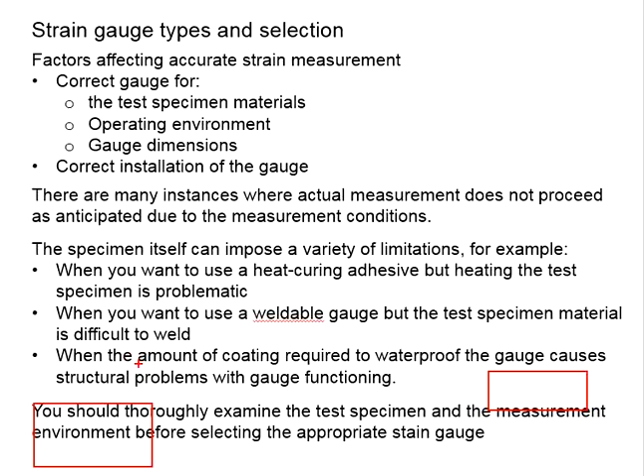The specimen itself can impose a variety of limitations. For example, when you want to use a heat curing adhesive but heating the test specimen is problematic, or when you want to use a weldable gauge but the test specimen material is difficult to weld, or when the amount of coating required to waterproof the gauge causes structural problems with gauge functioning. This may affect the ability of the strain gauge to do accurate measurement. You should thoroughly examine the test specimen as well as the measurement environment before selecting the appropriate strain gauge.

There are many types of strain gauge. Each has different purposes and features. In general, they can be classified into four broad groups. First, it will be the testing temperature. There are applicable ranges for the strain gauges. Some are suitable for low temperature. Some are for normal temperature, high temperature, and super high temperature.

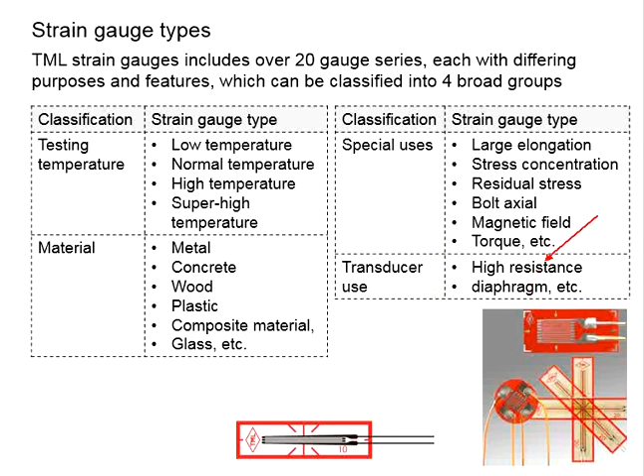The strain gauge can also be classified based on the materials of the test specimen. These include metal, concrete, wood, plastic, composite material, glass, and so on. Strain gauges can also be classified based on special uses, whether you need them for large elongations, stress concentrations, residual stress, bolt axial force, magnetic field, torque, and so on. The last one is transducer use, whether it is high resistance or diaphragm, and so on.

The second criterion of strain gauge selection is the size of the strain gauge. This is sometimes dependent on the location where the strain gauge is to be installed, as well as the materials that you intend to measure. Not only that, you might need to consider the space required for the coating when determining the gauge size, as normally the lead wire will need to be connected to the connecting terminal.

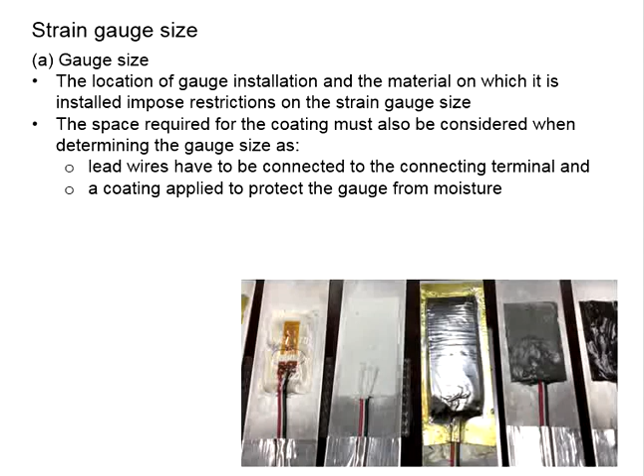Something like this. You have a typical strain gauge. It doesn't come with the wires. You will need to do some soldering in order to connect the strain gauge to the wire so that it can be connected to the data logger. Now you will need space for you to place the terminal and also for you to do the soldering. This is how you do the soldering.

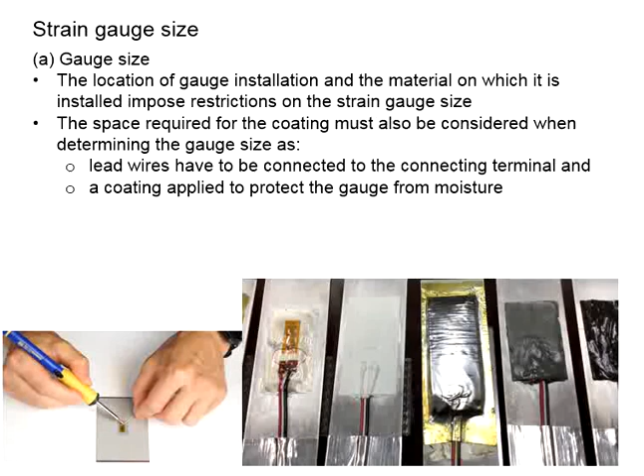You need to be able to access the strain gauge, which has already been installed on your test specimen. This requires space. Or you need to consider the space required for the coating applied to protect the gauge from moisture. With that, determining the suitable size of the strain gauge is important.

Another thing that you need to consider related to the strain gauge size is the gauge length. This refers to the length of the sensitive element in the strain gauge. Depending on your test specimen, a different gauge length is selected.

Now, short gauge lengths are used for local strain, while long gauge lengths are for average strain over a large area. You may refer to the table here for the applications of strain gauges with different gauge lengths. A strain gauge with a gauge length of 0.2 to 1 mm is normally used to measure stress concentrations. This is very narrow in fact.

You will need to select the locations of the measurement carefully to be able to pinpoint and measure the strain that is later converted into stress. As for metals and general use, the suitable gauge length will be between 2 to 6 mm.

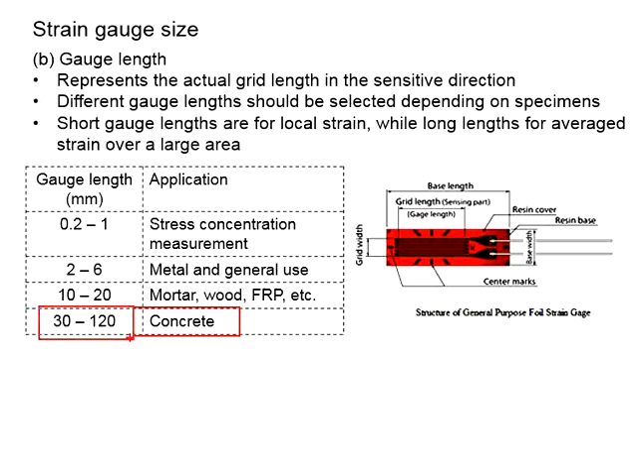For mortar, wood, and FRP, FRP stands for fiber reinforced polymer, you may use a gauge length of 10 mm to 20 mm. As for concrete, you can use a gauge length of 30 to 120 mm. These are some tips that you can consider while selecting the suitable gauge length.

Heterogeneous materials are normally composites, where the contents have diverse characters. One example of this kind of material is concrete, which is made of cement paste and aggregate. If you're dealing with this kind of material, due to the diversity of the properties of their compounds, measuring local strain becomes not representative.

When this kind of material is subjected to load, stress normally concentrates at the weaker compound, progressively damaging the weaker compound, until at the end of the day the entire specimen fails. Taking concrete as an example, we know that the aggregate is very strong. The weak part is normally the bond between the aggregate and the cement paste.

Now, how can you tell, in the concrete, where the possible places are that give you high stress that ultimately may go beyond the strength of the material and lead to its failure? In that case, it is more suitable to determine the average of the irregular strain in the material. That means the strain gauge should cover a wider area in order to acquire the average value over the measured region.

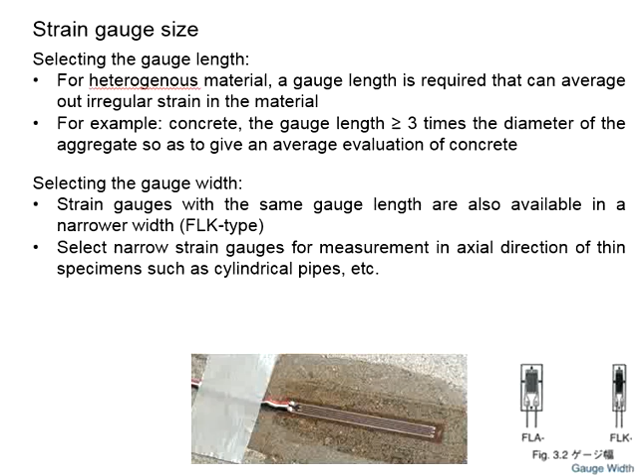Next is selecting the gauge width. Strain gauges with the same gauge length are also available in a narrower width, something like this. This is the FLA series, and this is the FLK series. Then you will have to consider which one is more suitable for your test specimen.

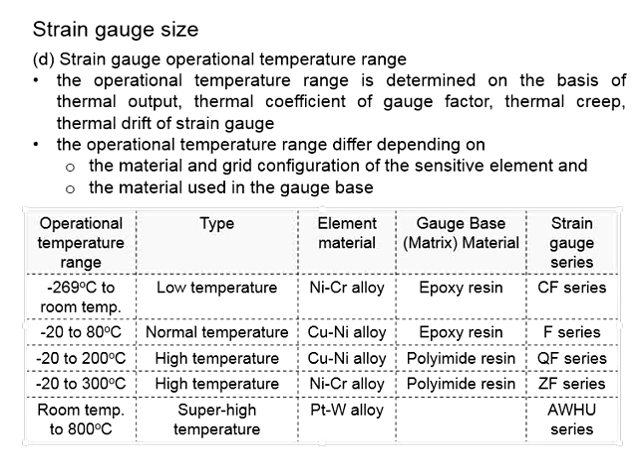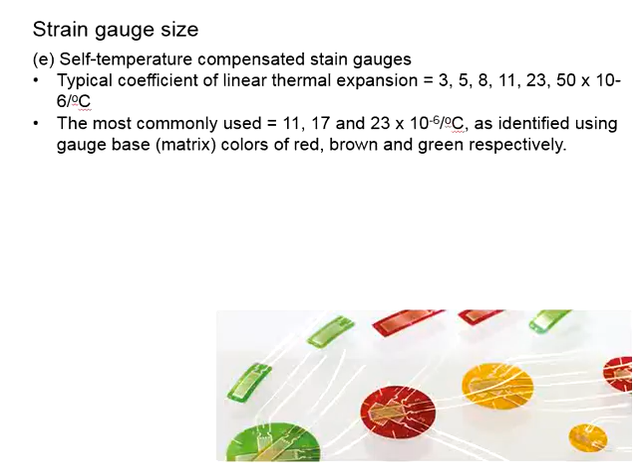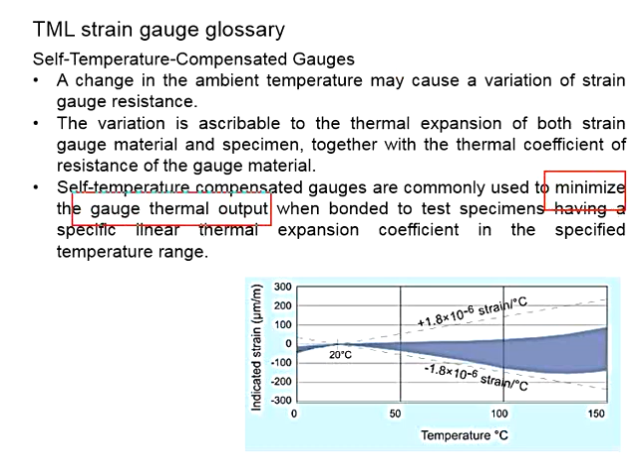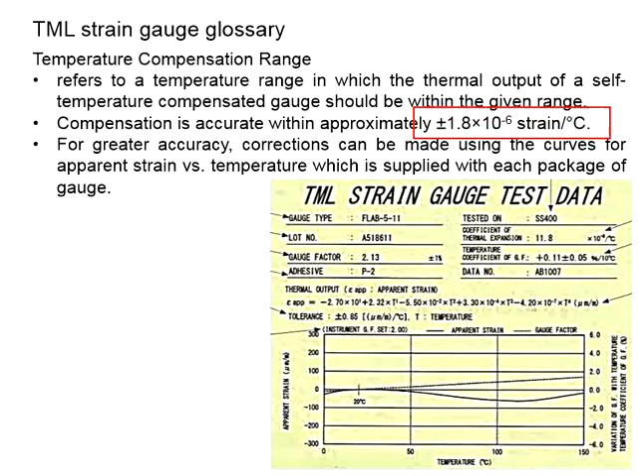The self-temperature compensated gauges are commonly used to minimize the gauge thermal output when bonded to the test specimen. This thermal output will need to be within the acceptable range of ± 1.8 times 10 to the power of -6 strain per degree Celsius. Next, you need to consider the strain distribution. For this one, you have to consider the gauge length and the width. Select the appropriate gauge size for the measurement purpose based on the strain distributions and material.

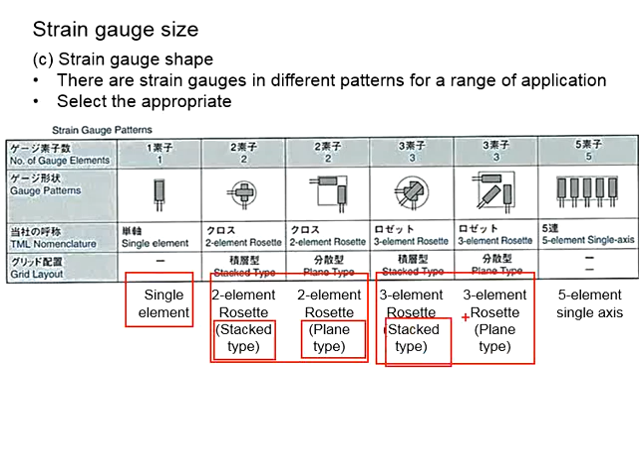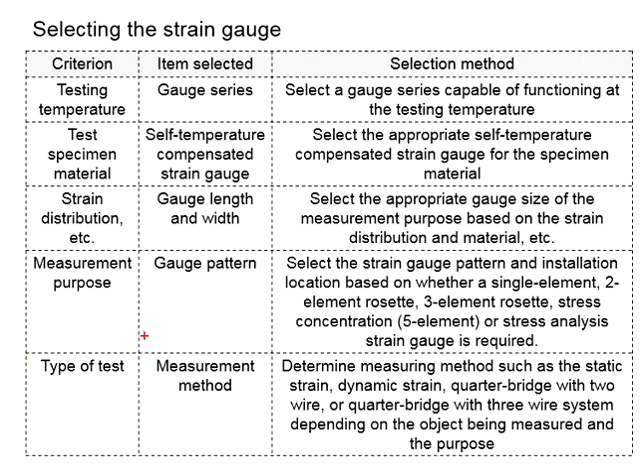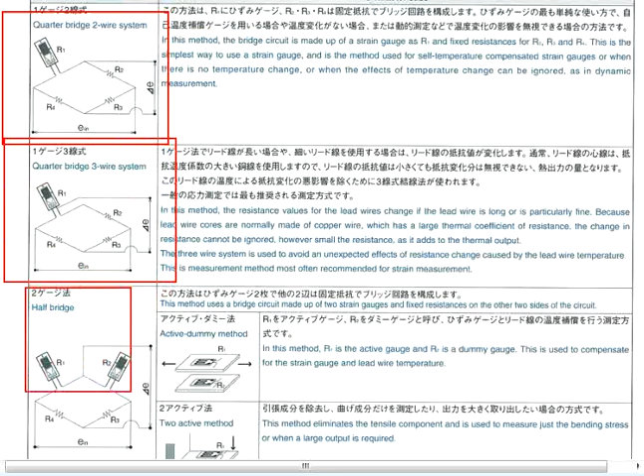And then about the measurement purpose, you need to look at the gauge pattern. These are the typical gauge patterns, each serving different purposes. You have single element, 2 element rosette, either stacked type or plane type, 3 element rosette, stacked type or plane type, and 5 element single axis. Lastly is the type of testing. We are looking into the measurement method. The strain measurement methods are referred to here. There are various ways to measure the strain. Each serves different purposes. For more detail, you may refer to the relevant references.